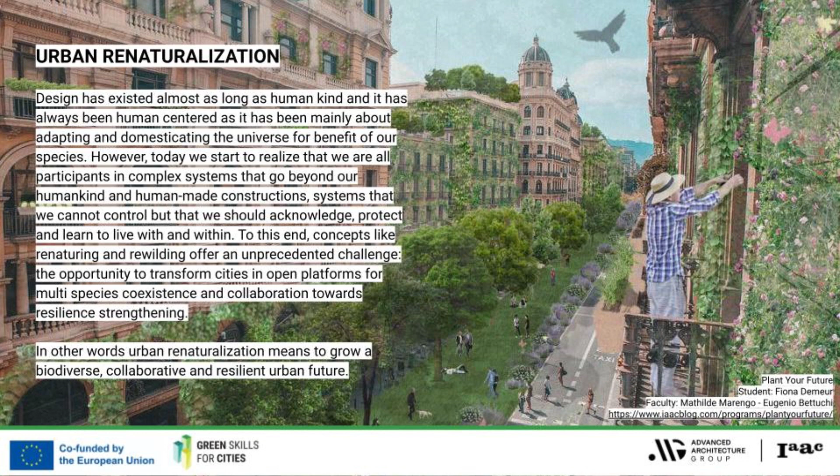What is urban renaturalization? Design has existed almost as long as humankind, and it has always been human-centered, as it has mainly been about adapting and domesticating the universe for the benefit of our species. Concepts like renaturing and rewilding offer an unprecedented challenge: the opportunity to transform cities into open platforms for multi-species coexistence and collaboration towards resilience strengthening. In other words, urban renaturalization means to grow a biodiverse, collaborative, and resilient urban future.

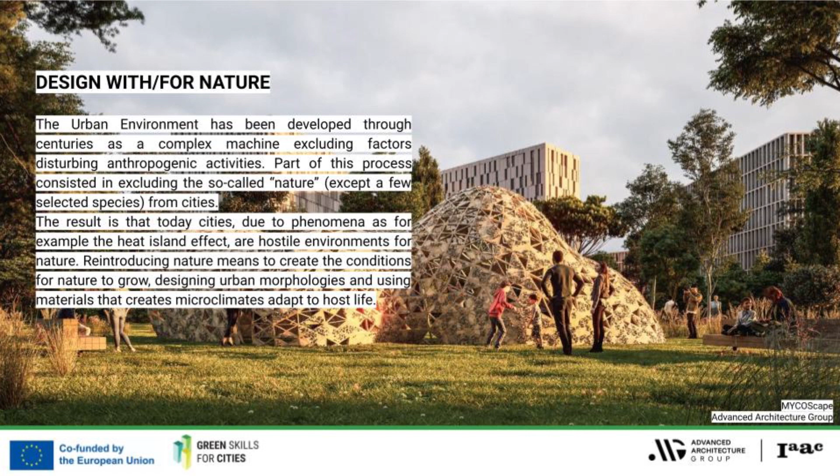The urban environment has been developed through centuries as a complex machine excluding factors disturbing anthropogenic activities. Part of this process consisted in excluding the so-called nature, except for a few selected species, from cities. The result is that today cities, due to phenomena such as the urban heat island effect, are hostile environments for nature. Reintroducing nature means to create the conditions for nature to grow, designing urban morphologies and using materials that create microclimates to adapt and host life.

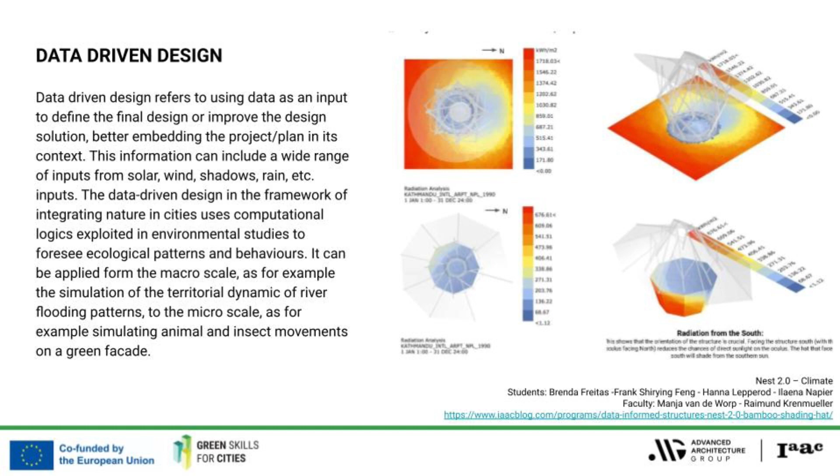Technologies supporting the integration of nature in cities. How can digital technologies support us to design cities where we integrate living systems, making the urban environment more resilient and ecosystems stronger? Data-driven design refers to using data as an input to define the final design or improve the design solution, better embedding the project or plan in its context. This information can include a wide range of inputs, from solar, wind, shadows, rain, etc. Data-driven design in the framework of integrating nature in cities uses computational logics exploited in environmental studies to foresee ecological patterns and behaviors.

Data collection and management. In order to integrate data and develop analysis, we need to rely on data availability. Large open data sets can be used. However, in case data is needed or not available, it needs to be collected through sensors. Data collected can be integrated in simulation platforms, allowing us to understand how the initial situation can vary according to the design decisions we take.

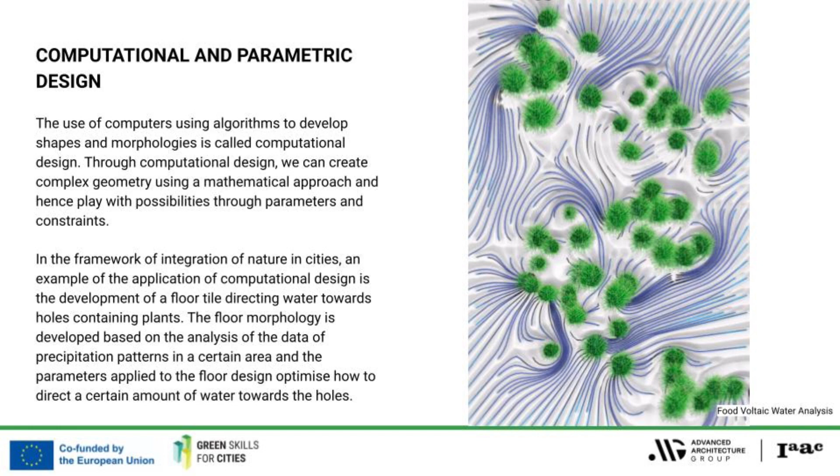Computational and parametric design. The use of computers using algorithms to develop shapes and morphologies is called computational design. Through computational design, we can create complex geometry using a mathematical approach and hence play with the possibilities through parameters and constraints. Digital fabrication is a manufacturing process whereby machines such as robots, 3D printers, CNC milling machines, and laser cutting machines are controlled by computers. The advantage of using digital fabrication is that each element can have a different shape morphology, contrary to what happens in mass production, where each piece is done with the same or a limited amount of different molds.

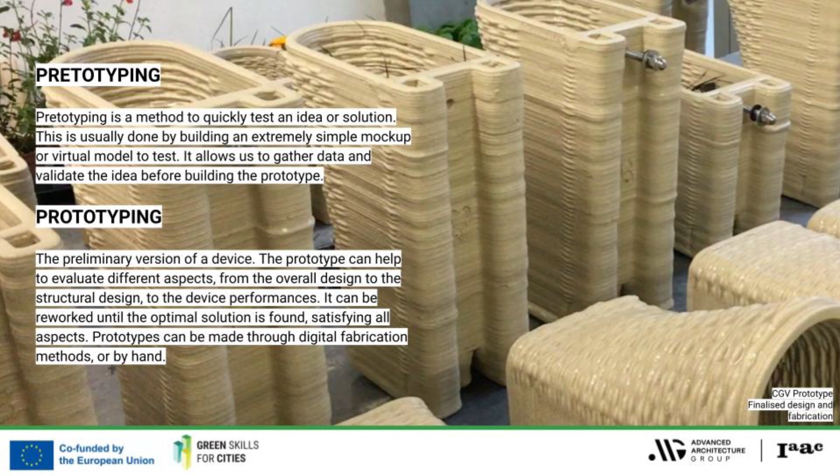Pretotyping is a method to quickly test an idea or solution. This is usually done by building an extremely simple mock-up or virtual model to test. It allows us to gather data and validate the idea before building the prototype. Often this is quick and messy, using materials that are found locally. Prototyping. The preliminary version of a device. The prototype can help to evaluate different aspects, from the overall design to the structural design to the device's performance. It can be reworked until the optimal solution is found, satisfying all aspects. Prototypes can be made through digital fabrication methods or by hand.

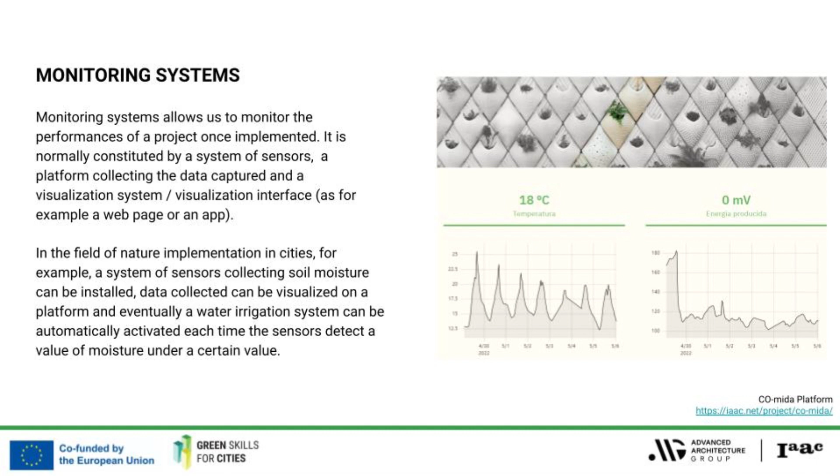Monitoring systems allow us to monitor the performance of a project once implemented. It normally consists of a system of sensors, a platform collecting the data captured, and a visualization system or interface, as for example, a web page or an app.

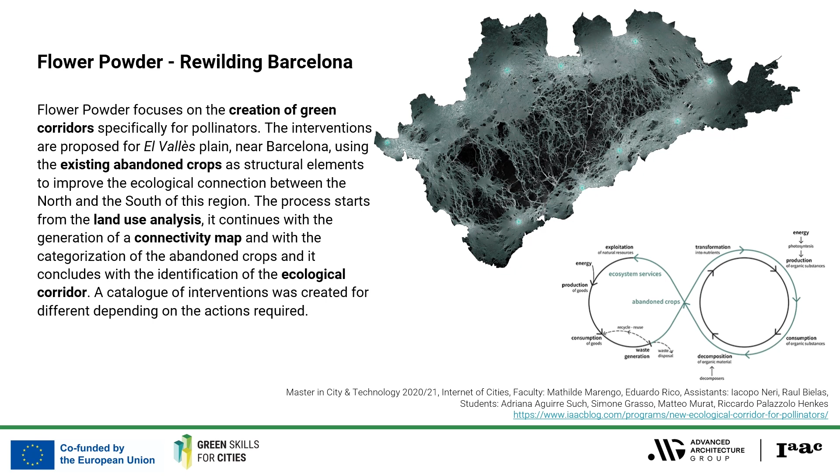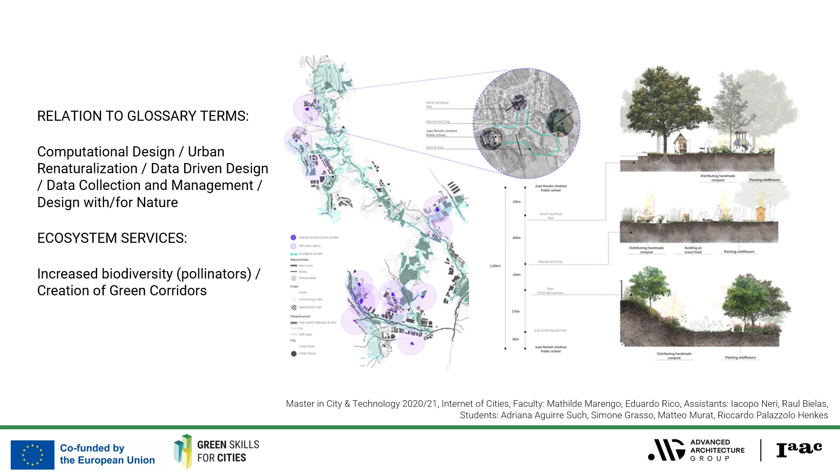Design with or for nature case studies. We will begin with urban design with or for nature. Flower Powder focuses on the creation of green corridors specifically for pollinators. The interventions are proposed for an area very close to Barcelona, using existing abandoned crops as structural elements to improve the ecological connection between different parts of the region. Firstly, there are a lot of computational design tools used to simulate the data. Also, it focuses on urban renaturalization, as well as data-driven design and data collection and management. Here, this proposal is specifically for designing with nature for nature.

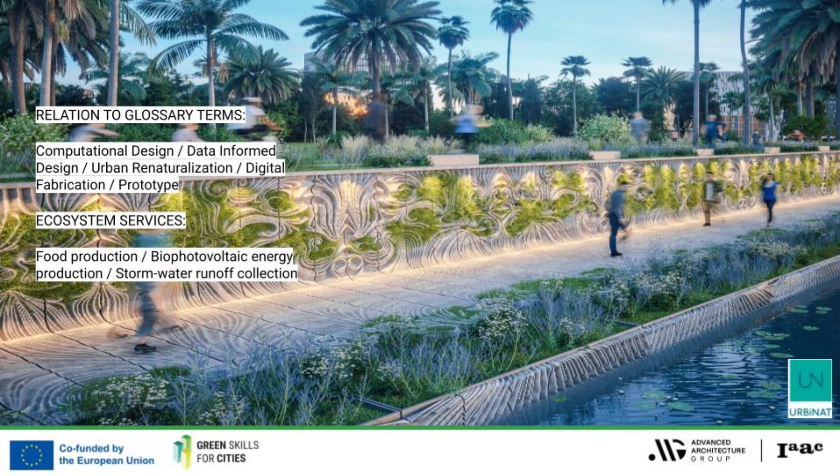Building and public space design with or for nature case studies. Firstly, we have Food Voltaic, which consists of an urban infrastructure targeted to enhance the city's resilience. This is achieved by increasing food production, producing renewable energy, purifying the air, mitigating flooding, trapping water, and informing the citizens about environmental conditions. Through digital technologies and advanced manufacturing techniques, the system enhances and exploits the properties of living materials. This project is a prime example of computational and parametric design, focusing on data-informed design based on rainfall and promoting urban renaturalization and digital fabrication techniques. The ecosystem services provided include food production, biophotovoltaic energy production, and stormwater runoff collection.

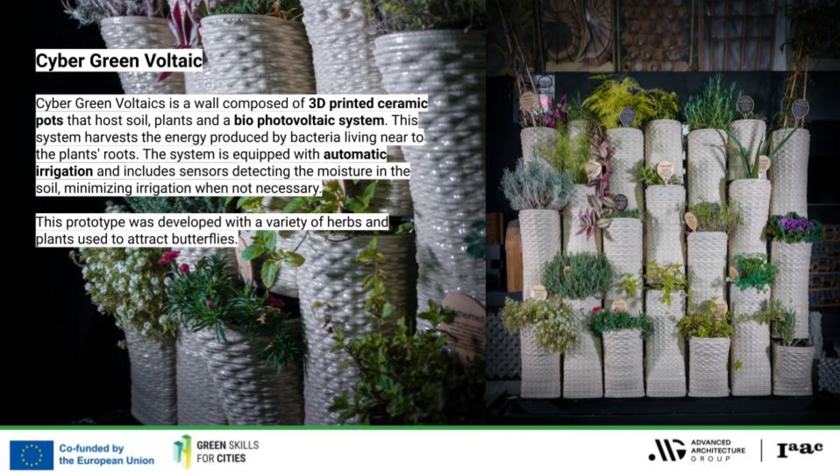Cyber Green Voltaic is a wall composed of 3D printed ceramic pots that host soil, plants, and a biophotovoltaic system. This system harvests the energy produced by the bacteria living near the plant's roots. The system is equipped with an automatic irrigation system and includes sensors detecting the moisture in the soil.

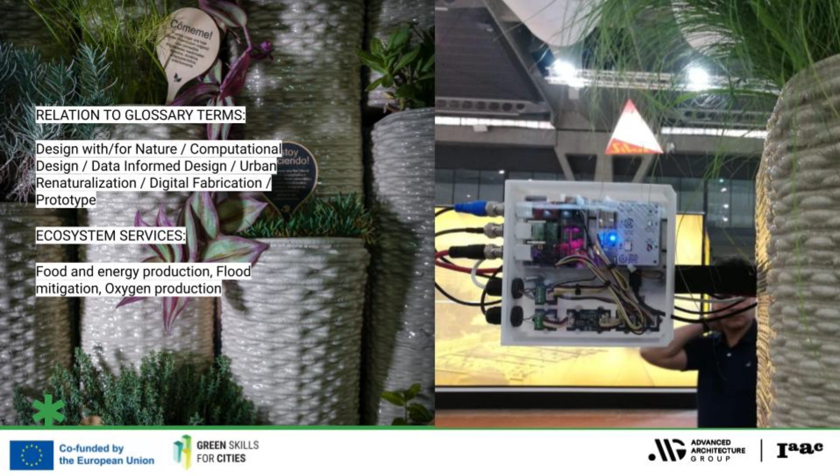How does it relate to the glossary terms? Well, again, it's focusing on designing with nature, for nature. Using computational design and digital fabrication tools, the prototype was built. And again, it focuses on urban renaturalization through data-informed design. The ecosystem services provided include food and energy production, flood mitigation, as well as oxygen production.

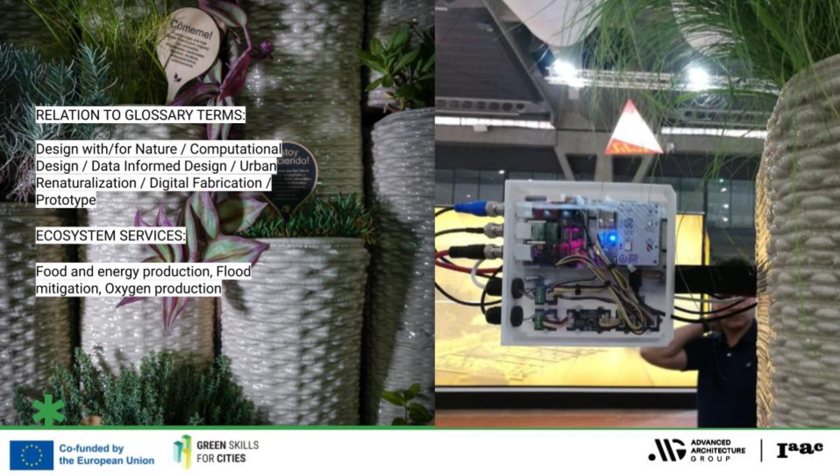MYCO-Scape is a modular system which supports the growth of mushrooms in the urban environment, public spaces, facades, and rooftops. The structure's modules allow for both food and construction materials to be produced. The modules house the substrate, straw, and mycelium spores for 3 weeks to allow the mushrooms to grow. After this time, it is possible to eat the mushroom flower and use the roots as insulation panel.

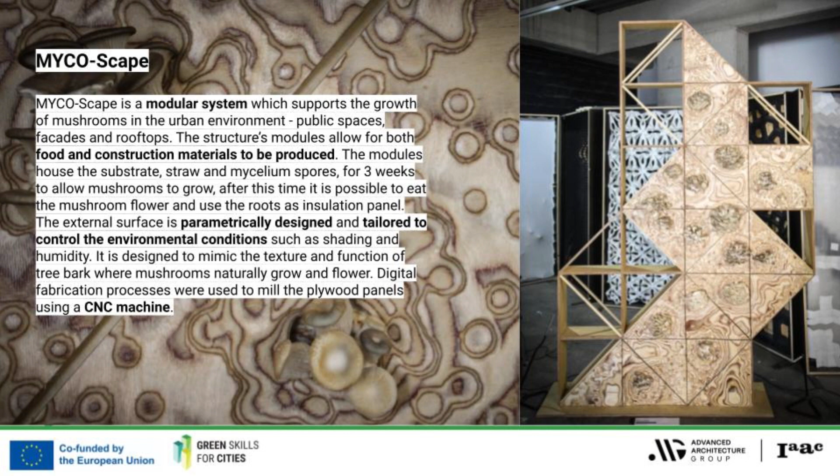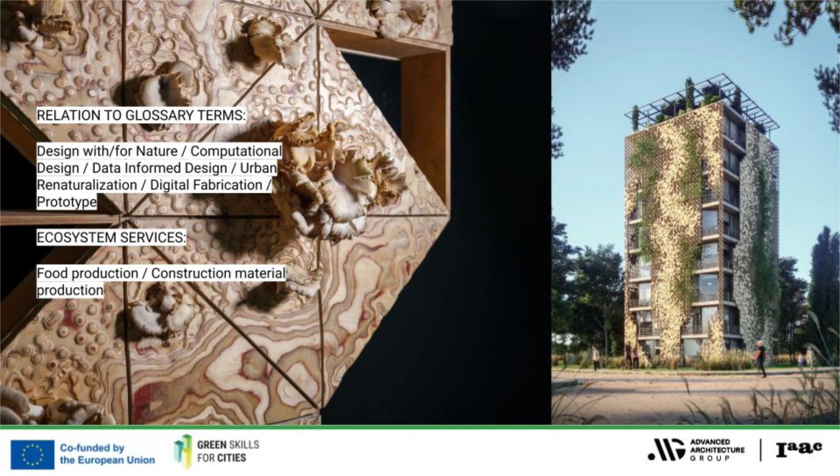The external surface is parametrically designed and tailored to control the environmental conditions, such as shading and humidity. It is designed to mimic the texture and function of tree bark, where mushrooms naturally grow and flower. Digital fabrication processes are used to mill the plywood panels using a CNC machine. It focuses on urban renaturalization through digital fabrication techniques to build this prototype you can see on the left. The ecosystem services provided include food production and construction materials.

Co-mida combines nature-based solutions with robotic 3D printing technology and digital technologies to create an automated green wall. It is installed in a community garden where the wall is maintained by the community with the aim of growing food, providing homes for birds, bats, and insects, and generating electricity through a biophotovoltaic system. The tiles and pots were parametrically designed with a texture to encourage moss and microbial growth. They were 3D printed in ceramic using a robotic arm before being fired.

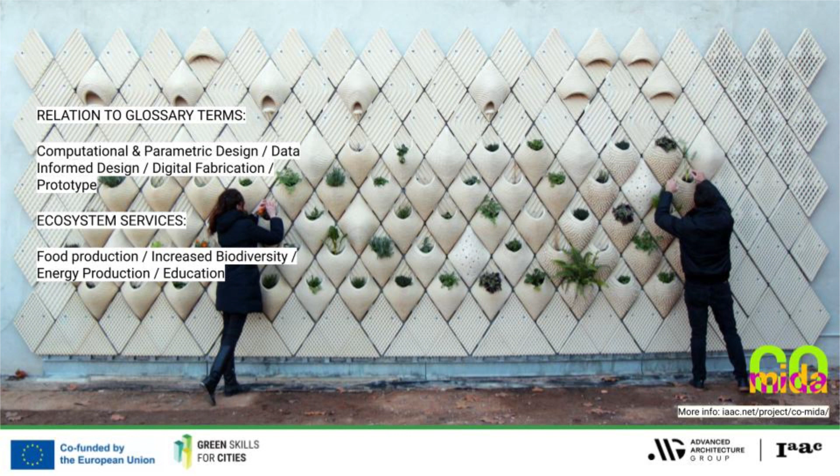The pots and the tiles are mounted on a structure with an automated watering system, triggered by humidity sensors in the soil. In addition, there were sensors incorporated into hubs that measure the air temperature and the amount of energy produced by the biophotovoltaic system. Here, again, computational and parametric design tools were used, as well as focusing on participatory design through digital fabrication and prototyping. The ecosystem services produced are food production, increased biodiversity, energy production, as well as education, as this wall is open to the public and maintained by the public of all ages.

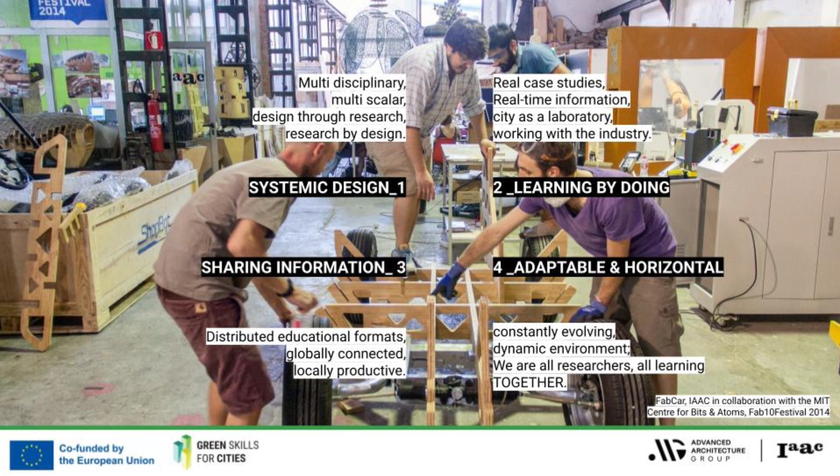Teaching design with or for nature. In this section, we would like to demonstrate to you how we structure courses at IAAC. At IAAC, our approach to learning is very hands-on, and we are always learning from one another. We practice systemic design, focusing on design through research and research by design, which is both multi-scalar and multidisciplinary. Then there is learning by doing, where we focus on real case studies, real-time information, and working with industry. Our city is our laboratory.

Sharing information is key. Through distributed educational formats and the global connectivity, we can produce locally while taking advantage of the knowledge around the world. At IAAC, we are adaptable and horizontal. We are all researchers learning together.

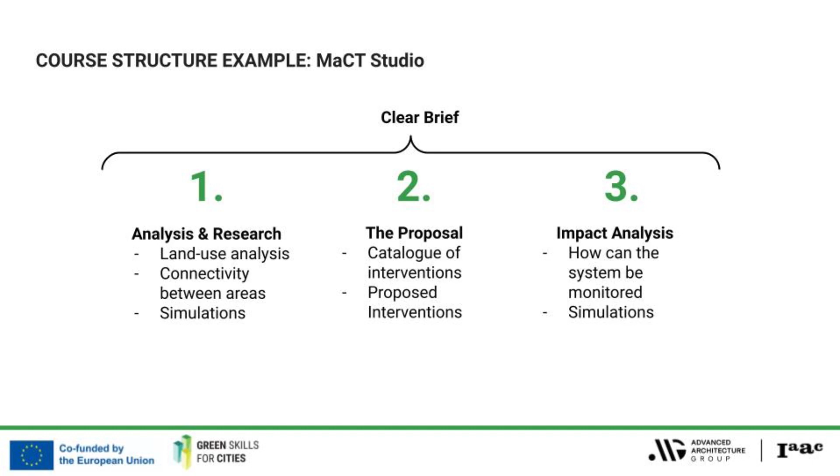Urban design with or for nature courses. We would like to share with you an example of a course structure developed for the Master in City and Technology Studio. This studio starts with a clear brief, such as eliminating cars from cities or expanding ecological connectivity. The first phase consists of analysis and research, learning GIS softwares, creating land use analysis, connectivity analysis, and demonstrating the information through simulations. The proposal is then created based off of a catalog of interventions before creating the final proposal. To be able to analyze the impact of the proposal, different simulations are carried out, as well as exploring how the system can be monitored.

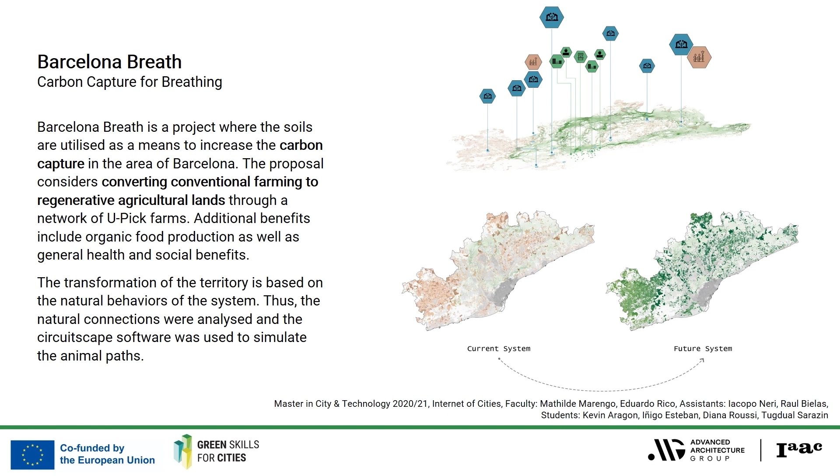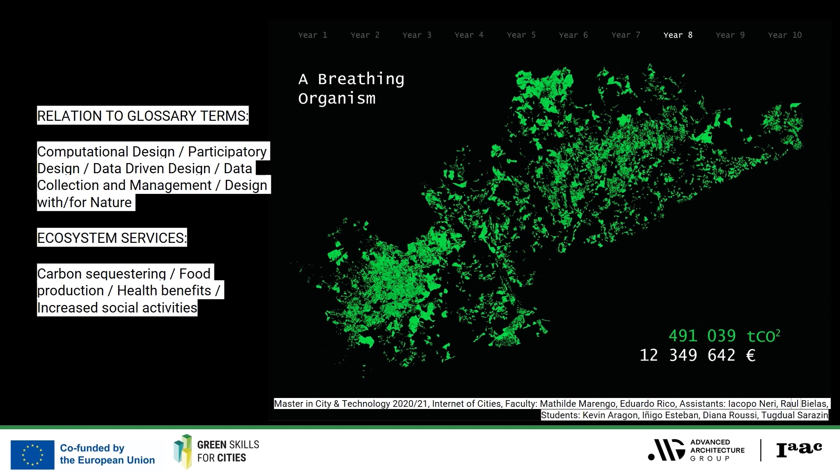Barcelona Breath is a project where the soils are utilized as a means to increase the carbon capture in the area of Barcelona. The proposal considers converting conventional farming to regenerative agricultural lands through a network of U-Pick farms. This includes computational design, data-driven design, data collection and management, and is designing with and for nature. The ecosystem services provided include carbon sequestering, food production, health benefits, and increased social activities.

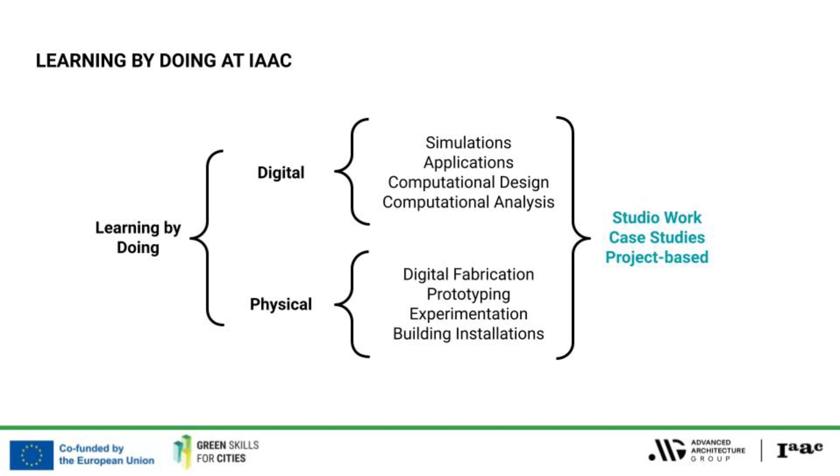Building and public space design with or for nature courses. We work both digitally and physically. During the digital side of things, we focus on simulations, creating applications, computational design, computational analysis, often through parametric design tools. Then we have the physical side of things, where we focus on digital fabrication, prototyping, experimentation, and actually building installations at one-to-one. All of this is achieved through studio work, case studies, and project-based seminars.

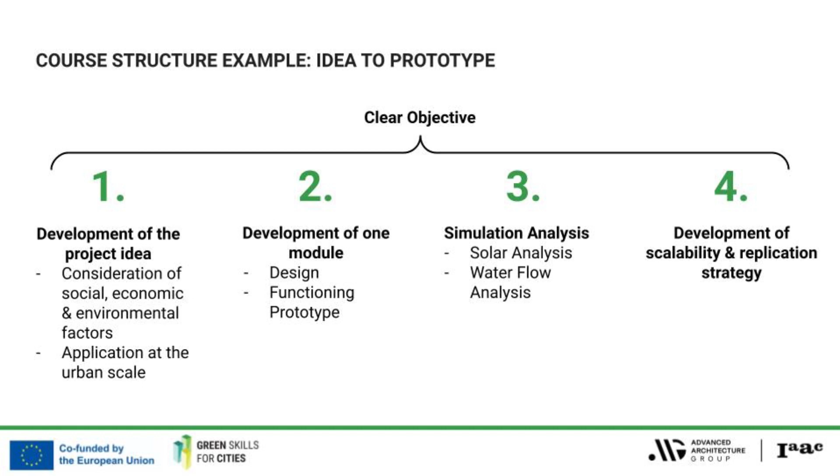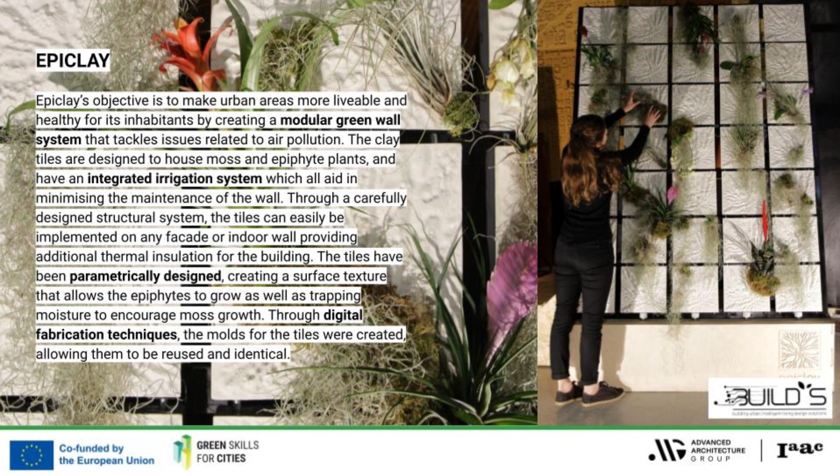Here you can see an example of the course structure that is developed for the Master in Advanced Architecture program, taking an idea to a prototype. This often starts with a clear objective before being subdivided into 4 phases. An example of this is the project EpiClay, which was developed during the BUILDS program. EpiClay's objective is to make urban areas more livable and healthy for its inhabitants by creating a modular green wall system that tackles issues related to air pollution.

So this is an example of living design, designing with nature for nature. It focuses on computational design tools as well as urban renaturalization and prototyping. The ecosystem services provided include air filtration, regulating the building's temperature, and increased biodiversity.

If you're interested in learning more about nature-based solutions and the city, you can check out the further reading material. We hope you enjoyed this video and have learned something about how to implement nature-based courses into your educational systems.